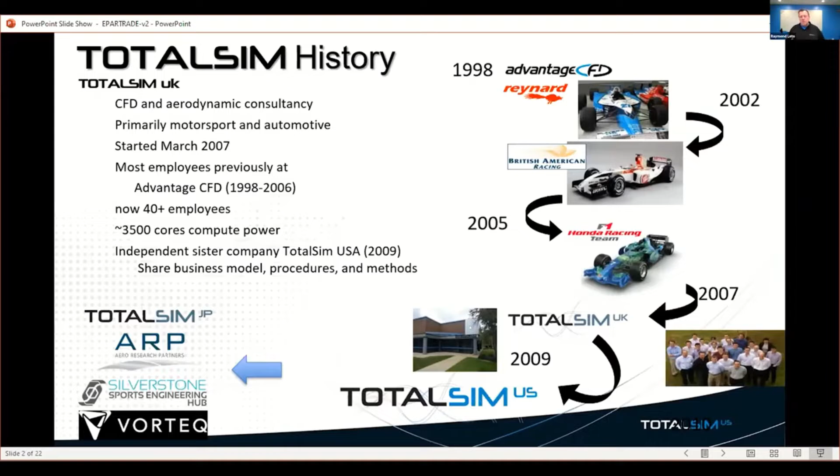Since then, TotalSim now has an office in Japan. TotalSim in the UK has built several other businesses: Aero Research Partners, that's developing a straight line testing facility; Silverstone Sports Engineering Hub, that contains a cycling and Olympic sliding sport wind tunnel, a very specific wind tunnel, with a lot of CFD and work around that; and Vorteq, which develops skin suits for mostly Olympic athletes.

Here in the US, like you said in the introduction, I spent most of my career in IndyCar and Champ Car, mostly at Rahal, doing everything from race engineering. I was happy to see one of my race drivers on earlier. Bryan Herta was a driver I worked with for 4 years at Rahal.

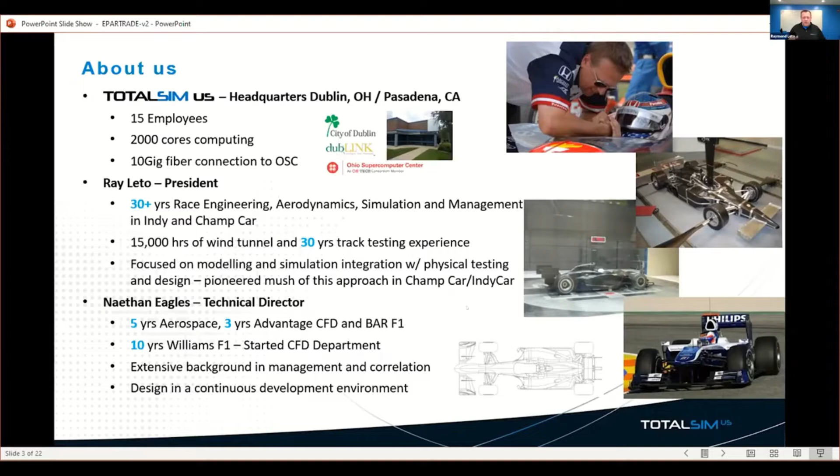So lots of wind tunnel testing, things like that. My business partner, Naethan Eagles, came out of the CFD side of things. He did some time in aerospace and then worked at Advantage CFD and BAR. Then he started the CFD department at Williams F1 and was there for a decade running that before we got together over here. So we have a diverse background in physical testing, wind tunnel testing, CFD.

And so mostly what we do is aero development. Like you said, we get involved in all kinds of things. We've diversified from automotive and aerospace into all kinds of things: marine, Olympic sports, industry, anything that has gas, fluids, water. We can model it with computational fluid dynamics. We're doing a lot of general aviation and drone work as well. And that's fairly interesting, concentrated in our small office we have out in California.

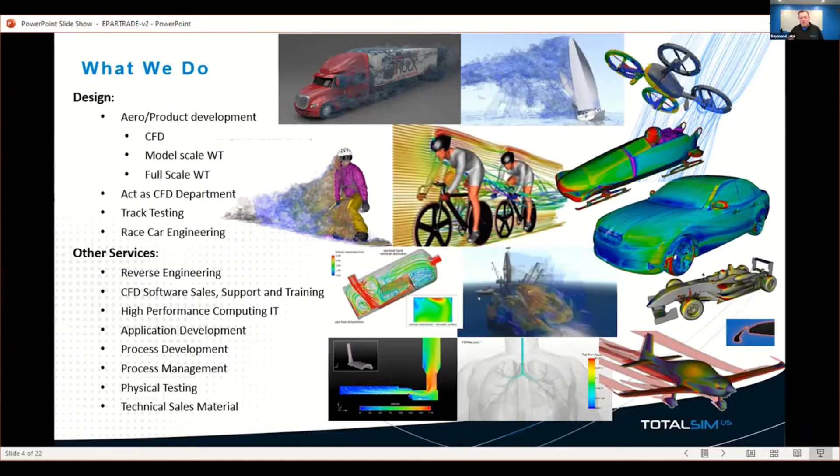So we still get involved in some physical testing and a few other things as well, but our core business is trying to apply this motorsports mentality of quick product development to different industries and move people forward with that kind of mindset, which we find interestingly, for those of us who've been in motorsports our whole life, when we get out of it into other industries, things move pretty slow. So we try and change that.

So what we want to talk about today quickly was basically what can we do with aero data and how do we get it? Right now, most of us know that you can get data on track or in a wind tunnel, either full scale or scale. Or now with computational fluid dynamics or CFD. So each of these things have different pros and cons. They have different cost levels.

Obviously, on track is the real car. You're out there, but you have to have good data acquisition. It's hard to get repeatable data. Maybe you go to a specific straight line testing facility to really hone in on getting data. During a race weekend, it's quite difficult. Full scale wind tunnel testing, again, it's the real car, but it costs what a real car costs. We've got to build prototype parts.

Full scale wind tunnel testing can range anywhere from $500 an hour for a small tunnel to $3,500 an hour or something like that. So a very expensive endeavor. Scale model wind tunnel testing is great if you have a model and you have access to it. If there's a model you can rent that simulates your car, that's great too. But if you have to start from scratch, quite expensive.

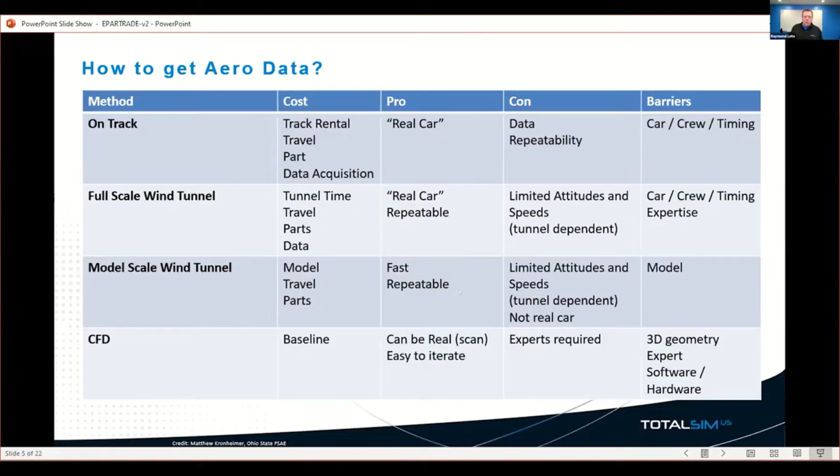CFD is somewhere in between. There's barriers to entry there too. So you need experts, you need 3D geometry. We need to get that car from the physical world into the virtual world. But these are what people are doing today in top level motorsports. And we see this moving down into the lower series right now.

So what can we do with aero data? Why do we do it? Well, my big thing is getting people to understand what they have and optimize it. So it's not always going out and trying to invent something new or design a new part or design your way out of a problem. Sometimes just optimizing what you have can move you to the front of the grid or move you up the grid substantially. So you have to understand that first.

And that's just like, let's say your dampers or your engine, your transmission. You're going to go to a shock dyno, you're going to understand that. We're going to go on an engine dyno or chassis dyno and understand where we are with our mapping and things like that. Same thing for aero. We want to go and just characterize the car, understand where it is.

Then, like the next presentation, Danny Nowlan will tell you for sure, once you have these maps for these things, then you want to go and find out what your trade-offs are. How can we optimize it? So we're going to find out that these maps maybe tell us to run one thing at one track, something else at another one. So we're definitely going to have different trade-offs for L over D between a street course at St.

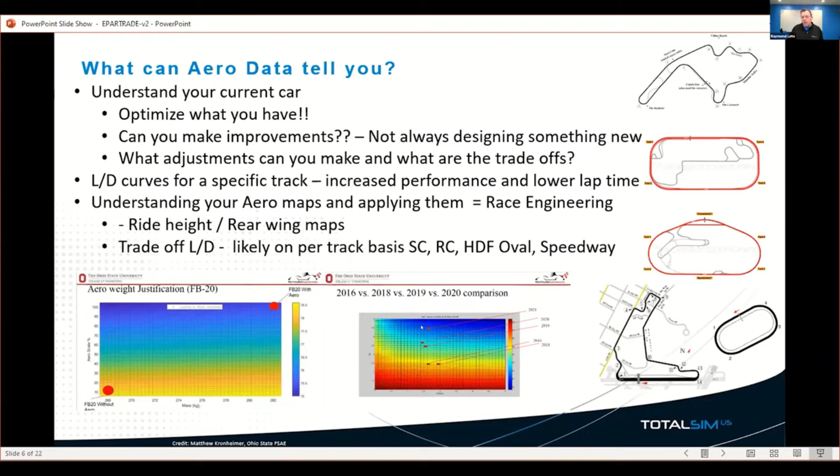One of the kids at Ohio State University that's running the aero side of their Formula SAE team, Matt Kronheimer, did some nice plots, which illustrate race engineering here, trying to look at trade-off plots of what would happen. This is L over D curves versus lap time for them. And as you make your way up through these contour plots, you can prove that you're making the car better. And you can do this virtually before you even go to the racetrack.

So, that's what we want to do with aero data. Whether we go to the wind tunnel or we go to CFD, we want to map it. So with a typical car, let's say like this F3 car we've got here, you would be mapping a range of ride heights, yaw, different attitudes, and then building that base map that we could then feed into something like Danny's chassis sim and look at these trade-off studies and do some optimization and say, where are we running our front ride height?

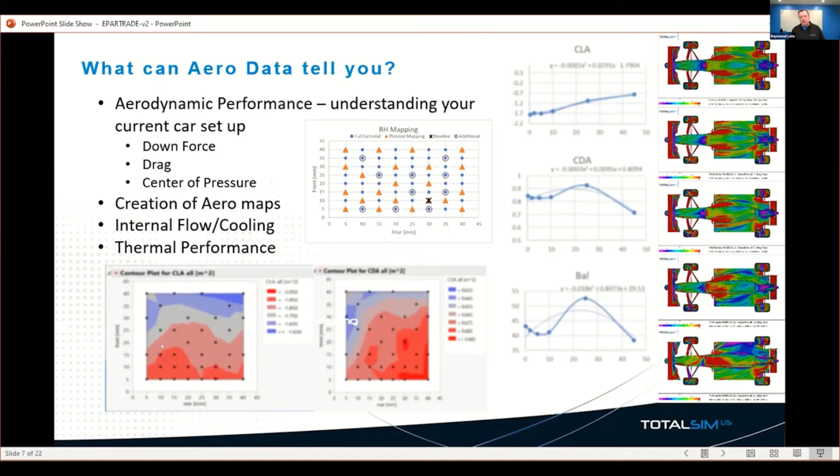Could we do better by changing the pitch of the car and optimize the downforce through the middle of the corner, or minimize the drag down the straight, things like that. So what is CFD? Basically, what are we talking about here? Really, CFD is just a virtual wind tunnel, essentially. We're taking a 3D model of the car, moving it into a virtual world, and then using physics and math to solve the fluid flow around it, solve the forces on the vehicle, and then better understand it.

So it involves going through a process of taking 3D geometry, what we call meshing, cleaning it up, building that volume of fluid around it, and then solving a bunch of math on a supercomputer. So the barriers to entry here are getting that 3D geometry into the virtual world. Do we have CAD? Do we need to do a scan? You do need some expertise in this. This is not picking up some app on your phone and learning how to use it in a few days. There is a lot of expertise that goes into it.

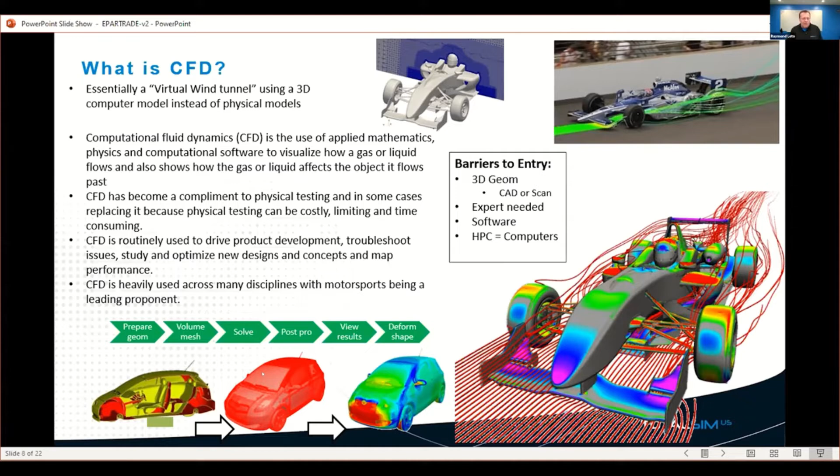And then of course you need the software and you need hardware. Typically for these top-end programs, we tend to solve our cases on somewhere between 200 and 400 cores per case. So this is a true supercomputer. We're fortunate in that we have a couple thousand cores in-house. We have a fiber connection to a supercomputer center here in Central Ohio that's one of the best in the country, so we have access to thousands and thousands of cores. Each of those cores typically costs about 5 cents per hour to rent or operate. So not a cheap exercise, but keep it in perspective with running the real race car.

So what extra can CFD do versus going to the wind tunnel or the racetrack? One thing is the flow visualization. We can see what's going on. We can cut through the fluid. We can color it. We can look at the flow on the surface. We can do optimization. So we can try many, many things in the virtual world that cost us a lot less than building prototypes and going to the racetrack.

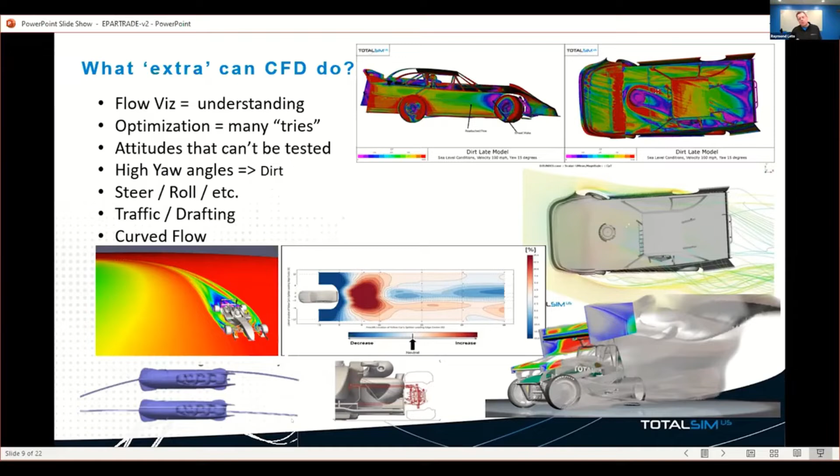So this middle plot, we've got a picture of what happens around, for instance, a Cup type car here when there's interaction between cars. We can't do that in a wind tunnel, have more than one car. Curved flow is an interesting thing in that when a car is going through a corner, it's not the same as testing at a slight yaw angle. The flow is actually curved. The car is taking a curved trajectory. So that's something you can do in the computational world that you can't do in a wind tunnel. So those are some interesting things.

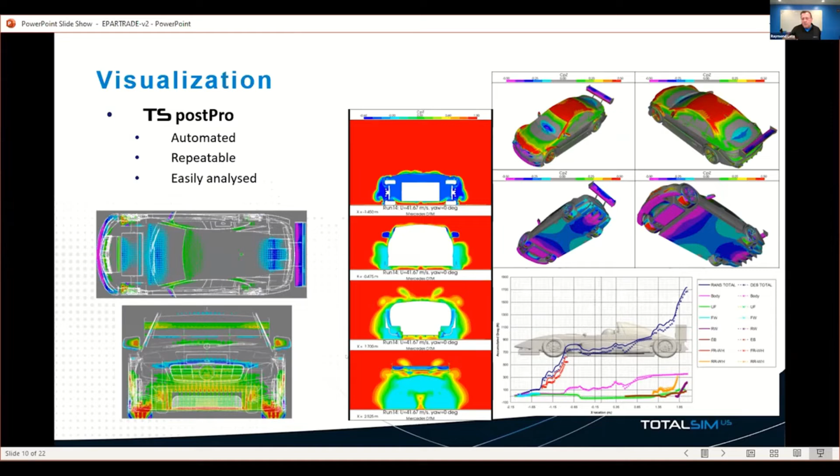So obviously one of the best things is visualization. We typically run hundreds and hundreds of movies and pictures on every case we run so that we can compare them. So you can really explore what's going on. In the real world, having a smoke wand would be analogous to that, or putting tufts on the car. But we can do this over and over again in the computer.

Another thing is optimization. So we can morph and bend shapes like it's clay or a pliable material, and then set up a study that's called a design of experiments type study, where you parameterize the geometry in a way that you think you can control it. And then we take basically a shotgun approach to it. It's almost like a Monte Carlo, where we just roll the dice and try every single permutation and combination, come up with a huge scatter plot and find that front of L over D that increases our performance.

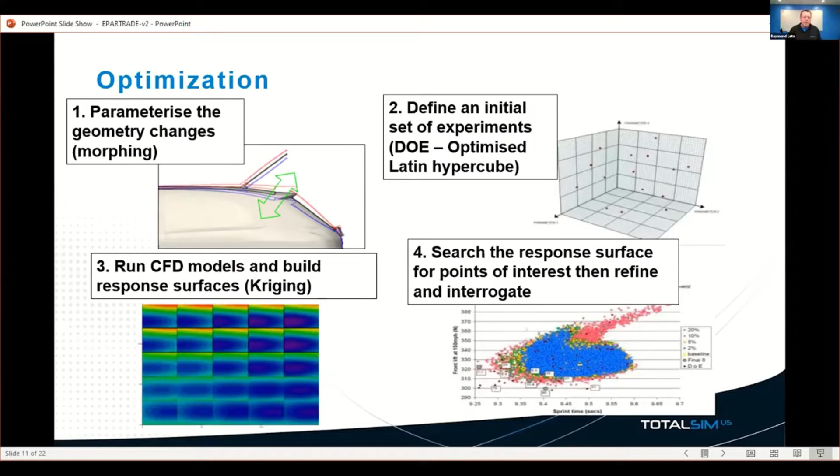So I wanted to give a couple examples of types of engagements that we see in the industry these days, or over the last few decades, and how that's changing. We've had large scale engagements with factory type racing programs and original equipment manufacturers for their factory type work. Those are large scale things that are over hundreds of thousands of dollars a year. We do see some medium scale things, which could be from a top level professional racing team or other organization that's interested in this type of stuff. And then smaller scale stuff.

And we're seeing a lot more of this at lower tier racing where people have interest in finding this information. Most of those projects are 10,000 or under. Then we've also been supporting DIY type things where people have some experience in this, or they've done projects with us, and then they want to start doing it themselves.

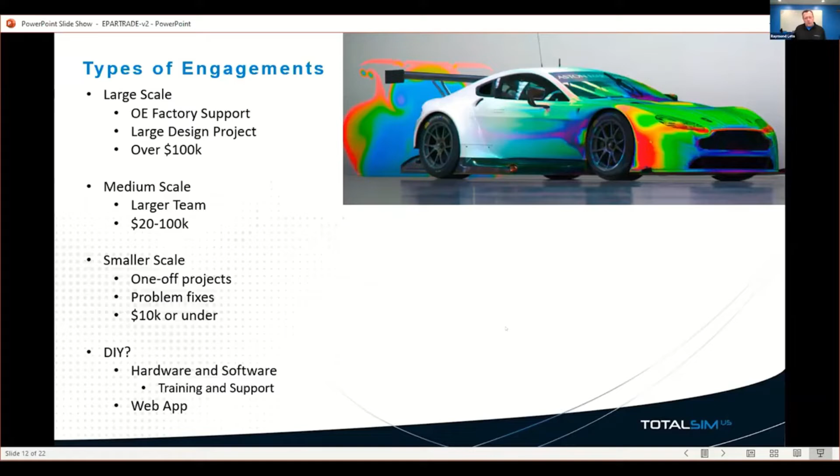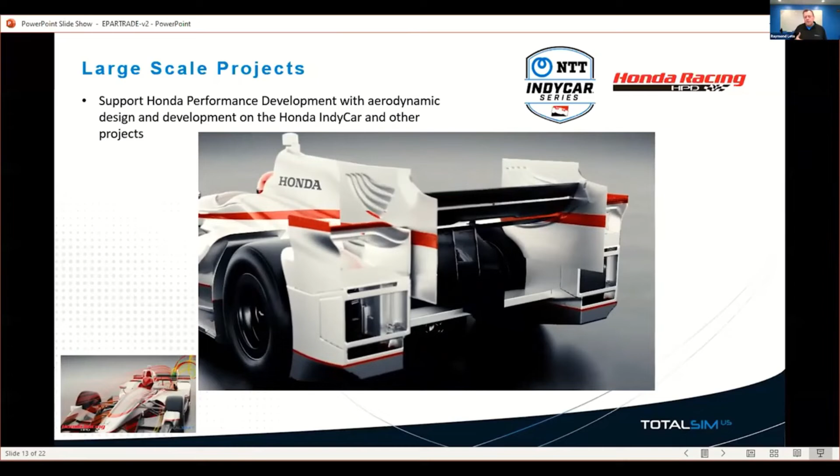So a large scale project would be something like our engagement with Honda. We've worked on and off with Honda Racing since this company started, and we've done things like aero kit stuff for IndyCar. These are big, large projects akin to Formula One, where we're designing an entire program from scratch. These are obviously sky-the-limit type things. Same thing in Cup. We were fortunate to be involved with one of the OEs back in 2013 when the new Gen 6 came around.

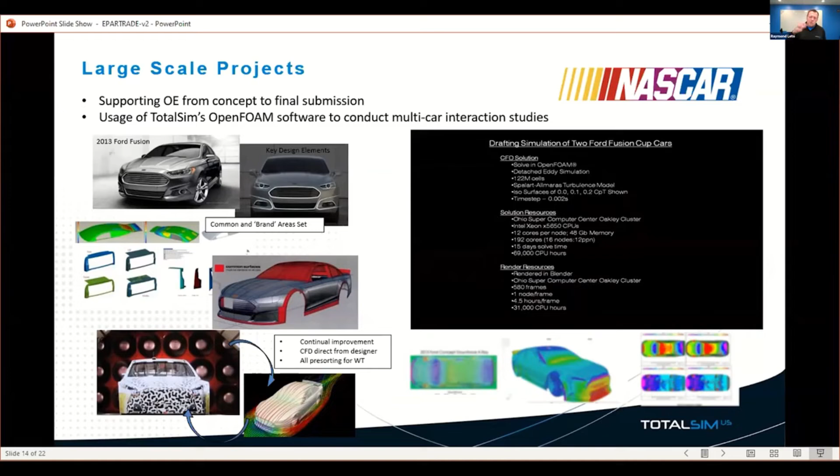Really cool application of CFD in a design process where you can start giving design cues. There were stylists involved, because there are supposed to be brand cues on these types of cars. So you want to give feedback to those designers so that they're not hurting the performance of the car, but still keeping that character they wanted in it. And that was all done in a virtual world before real prototypes were built and clay models were done.

A medium scale project: at TotalSim, we've been working with iRacing for most of our existence, 8 or 10 years. If you think about it, it's a perfect application for virtual racing. Putting a car in a virtual wind tunnel is perfect, right? When they came out with their dirt over a year ago, we did a lot of work with them to develop aero maps of these cars. This goes back to the first slide I was talking about, the uses of aero data. We have to characterize the car to be able to simulate it. In particular, this type of engagement is perfect because there's no known data for some of these cars.

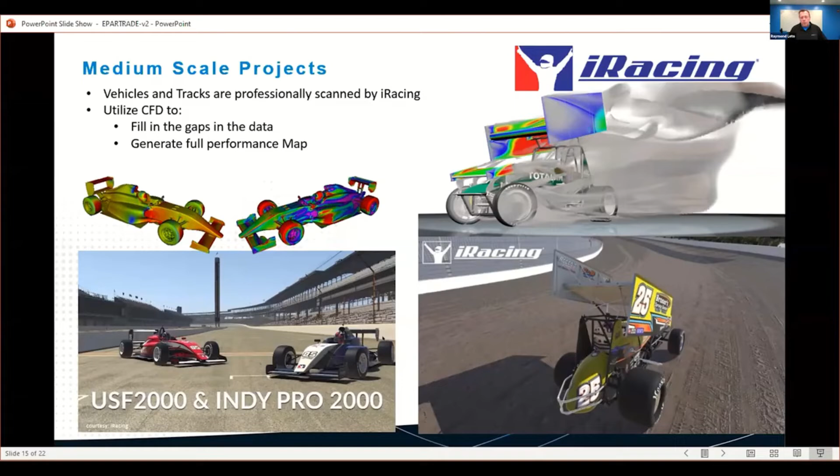So, but they have 3D geometry and they have a need to understand the physics and how the car reacts. And we got really good feedback on that. Recently, we just worked on their new USF 2000 and Pro 2000 cars, full mapping on that stuff.

Smaller scale projects. We've done a lot of land speed cars where somebody's got a particular small problem or they want to check stability on the salt flats. What's the car like if it gets out of shape? Some of these have come with CAD data. Alan Johnson, those guys have supplied CAD. Other people, it's a scanning project where we have to go out and scan the real car and then throw it in the virtual world.

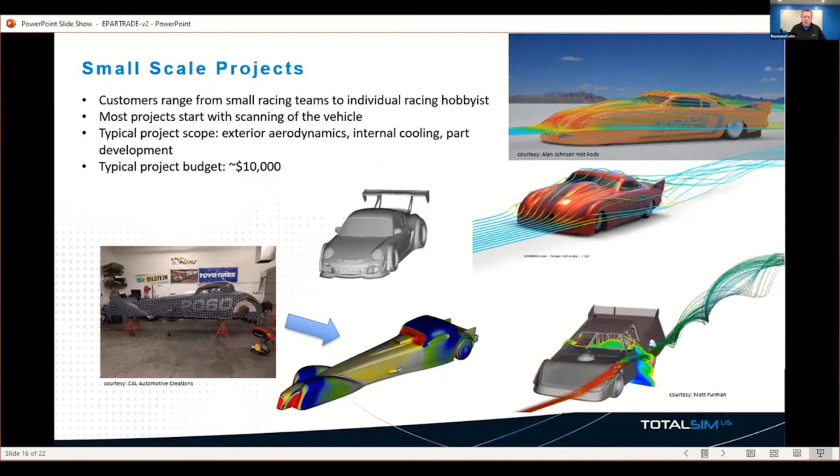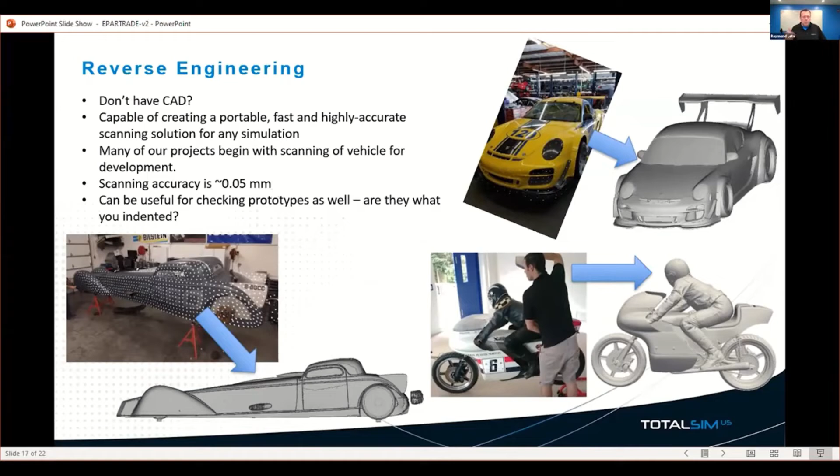So that kind of brings us to how do you get that 3D data? And if you don't have it anymore, there's people out there that can reverse engineer or scan the car. We're one of them. There's lots of vendors out there doing it, and they do it really well, where you can take exactly what you've got in short order, and for several thousand dollars, you can basically create a full CAD model of your car, and then we can push that right into the virtual world.

And then the DIY side. So we develop our own software, which is an open source software. It's a variant of an open source project that's out there that's been specifically altered to work better, or how we feel it should work, in the motorsports and automotive world. And we have worked with people. We have this installed at major original equipment manufacturers, large auto companies that use it for their drag prediction.

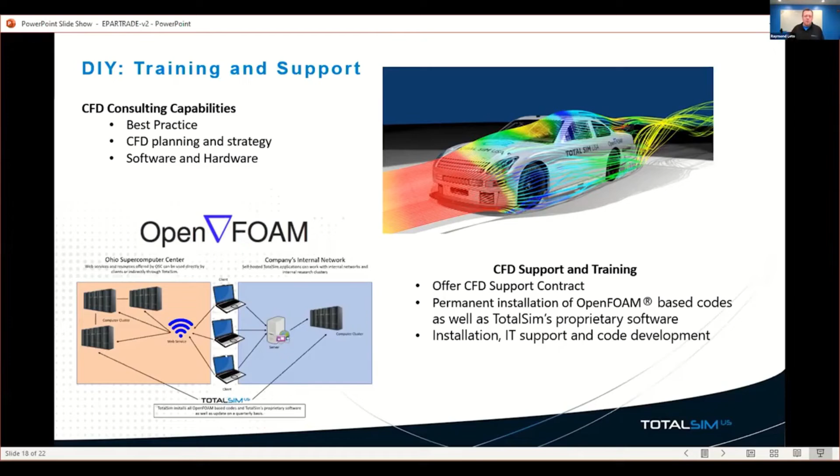So once we've worked with somebody, we can kind of help them set up their own CFD department, train them how to do things. One good example of that is NASCAR itself. NASCAR R&D uses our setup, and Eric Jacuzzi there in his aero department has used our software. We don't see any of the results. They do all their own work. They do multi-car work. They do design work.

So a lot of the aerodynamic design on the new car that's coming up in, well, I say '21, it's '22 now, thanks to 2020. But yeah, so that's a good example of how we've worked with someone and then kind of set them off on their own to expand.

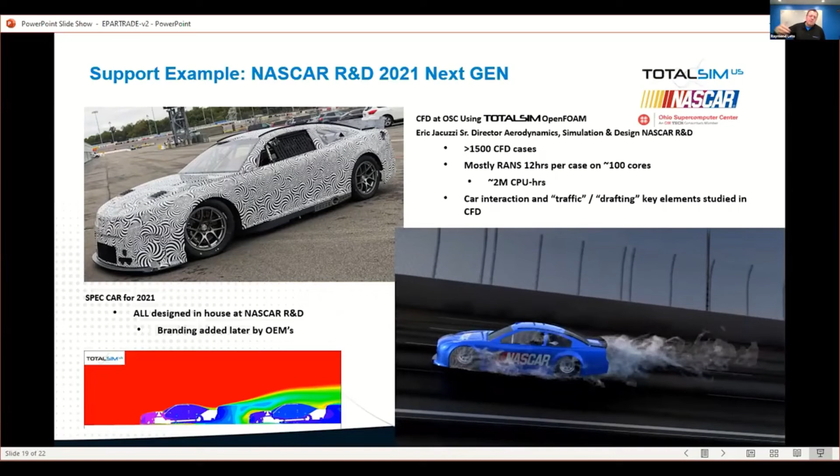We've got a new option too, where we've got kind of a TurboTax way of doing things, where you click your way through a web interface, and if you are a team or a manufacturer that is in control of their 3D CAD, we have a way now where you can upload all that. It has all of our best practice in the background in a black box that we've exposed a little bit of, but basically you can focus on being a designer, not have to worry about being a CFD expert,

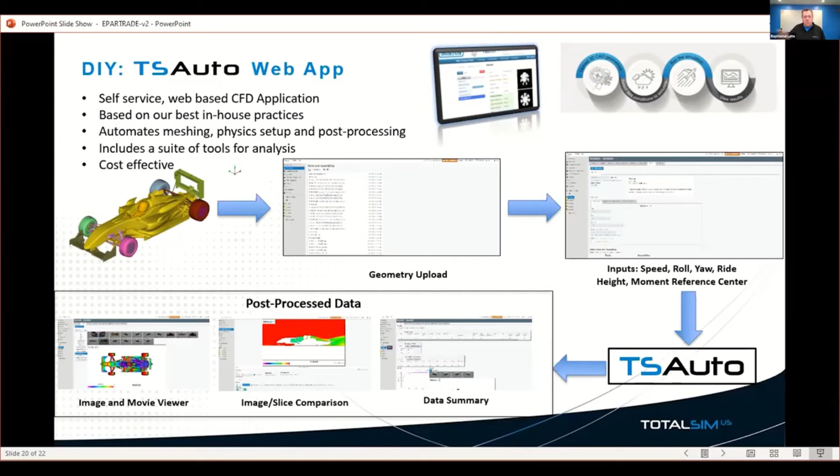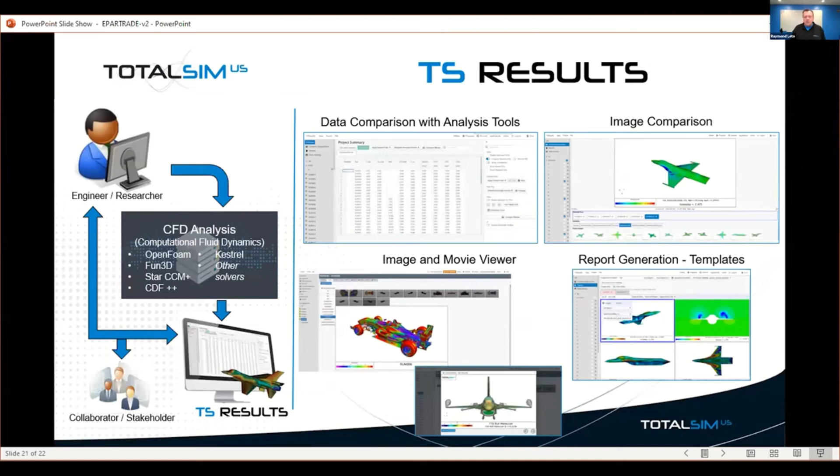and get all this post-processing and data back, and treat it like a real virtual wind tunnel. Upload your geometry, get the data back, just like you would go into the wind tunnel. And then we display all the results in what we've called TS Results. So it makes it easier to analyze and look at things.

Anyway, that was my short presentation, Brad, and hopefully I educated some people on what's going on out there in the CFD and aero world, and maybe we've come up with some questions that someone has.

Yeah, a couple of things from the chat. Let's see. Steve Shelley just says, hang on, I lost it, there we go. Great to see Ray. First met him in 1987 when he was prepping Carroll Smith's son's Super V. He was a genius then too. Man, this is what I came for, all the compliments from the audience. I didn't see the audience, I swear. That's funny.

A couple real questions. It says, Ray, remind me, do you use Sculptor? And that was from Paul Glessner. Yeah, well, we used to use Sculptor, and we still do on occasion. Sculptor, thanks for the question, Paul, is a specific software that you use to manipulate CAD. So you can take your initial design and then treat it like it was clay and morph it and push it and pull it.

And then you can do that in a structured way where you can set up, like I was showing with the optimization, where we can push and pull that. And there's more than one type of software that does that. Sculptor is one of the originals, and they're still very good at it. There's others like ANSA from Beta CAE, and even some native CAD software has that ability now to push and pull, just like you would in the wind tunnel, banging on a piece of metal or scraping on a piece of clay.